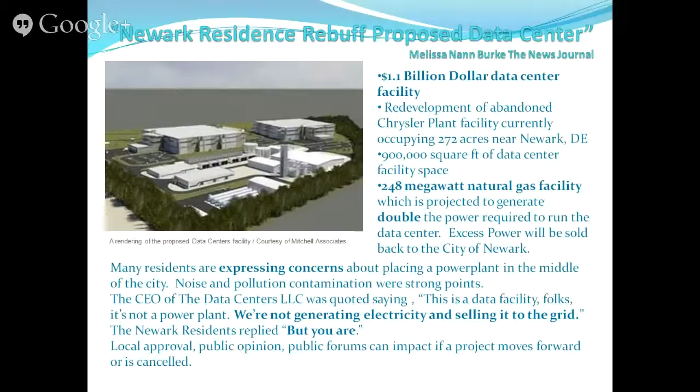This next one is OSHA proposes tougher limits for silica dust exposure. There's been a decade of studies that show that silica dust is not good. The proposal is to reduce the limit from 250 micrograms to 50. The feel in the industry is that exposure to silica is going to become what asbestos was during the 70s, and all the mesothelioma and similar symptoms are going to come about due to these silica studies. So they just want to pull it down a little bit and make sure that everybody's using the correct face protection.

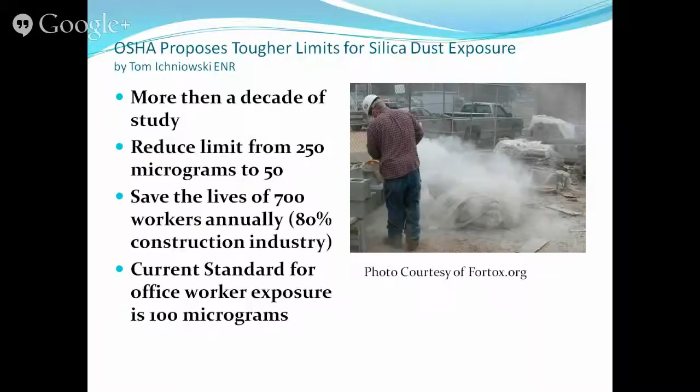Now, this is the Leo Frigo Memorial Bridge on Interstate 43 in Green Bay, Wisconsin. The bridge is having an uneven settlement issue. They're not really sure what the cause is, but there's 22 inches of settlement on one side for the single pier, and 27 on the other side, just across it, which is causing a lot of problems.

They attached sensors to see if it's moving anymore, and it hasn't. They tried to figure out what was wrong, if it was poor soils. There is a nearby landfill, and when they were renovating the bridge, they may have vibrated and compacted some of the soil, not on purpose, but at the time of the article, they weren't sure what had caused it.

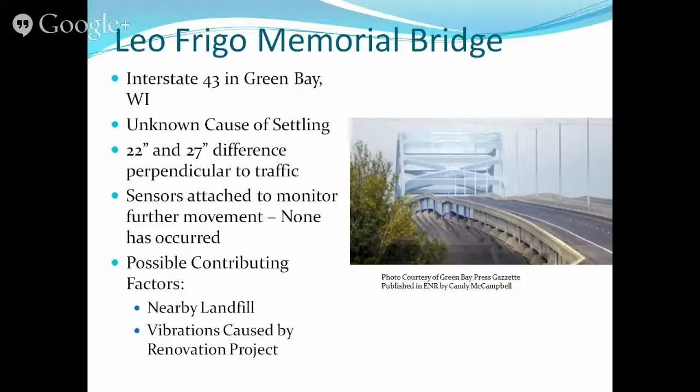This is the Southern Delivery System in Southern Colorado. It's a water management system. It's a $1 billion project. It's going to go on for the next 10 years. It's got two phases. The first phase is already underway, but the end result is that they get 50 million gallons of water out to the public. There's a bunch of pipe stations.

What's interesting is that this type of project is going to be huge if the EPA's estimate is correct, where they're saying that we need $384 billion in upgrades on our water infrastructure in the United States by the year 2030. So that's going to be a big market moving forward.

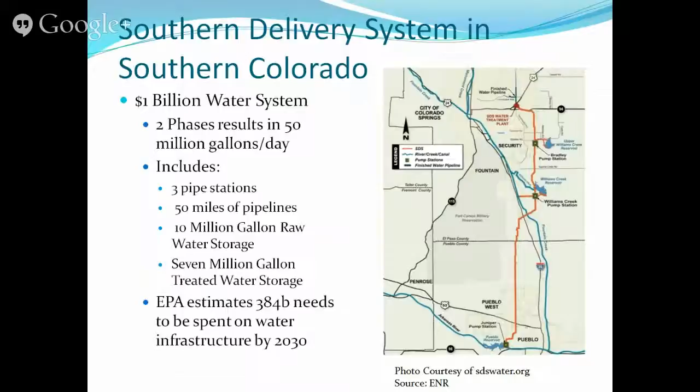They're building a pontoon bridge in Seattle. There was a problem with one of the pontoons. It actually cracked, so they had to replace it. It's a $4.65 billion rework of Route 520. So they build these concrete pontoons and then go out and float them in the river, and the bridge actually floats on them.

So when they post-tensioned the concrete in here, it caused the concrete to crack, and there are 3 other pontoons going that use the same design, that they made some modifications to, to help try and reduce the amount of cracking.

Another interesting thing on this project is they had a safety incident where alcohol was being consumed on the job site, and there's been a lot of controversy going around on this project and the way it's been managed. It's just interesting that something like that will get remembered, even though the crack is completely separate from the safety incident. Every newspaper article almost always references the safety incident as something that was going on earlier in the project. So the cost of the rework of this single pontoon is $71.2 million, and they just got it resolved here in October from the middle of the summer.

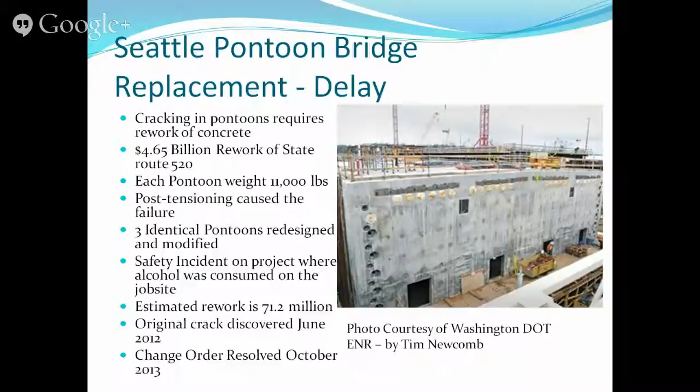This is in San Francisco. There was an existing structure that they were going to remodel. And in order to bring it up to seismic code, they were going to have to do extensive seismic installation on the inside. So instead of performing standard modifications, they looked at a Japanese pagoda, which has a single tree trunk in the middle that supports and stabilizes the core.

So they do the same thing here, where they take the core with the elevators and they put it on a bearing on an individual mat. So this entire core can pivot and shake and move separate from the outside walls. So it's an 8 million pound core that sits on this bearing. And the idea is that it'll limit the inter-story drift during an earthquake event.

By doing this, they save $4 million in retrofit costs and 10 weeks off the construction schedule. So it kind of shows the importance of modern technology or new designs on schedule and cost.

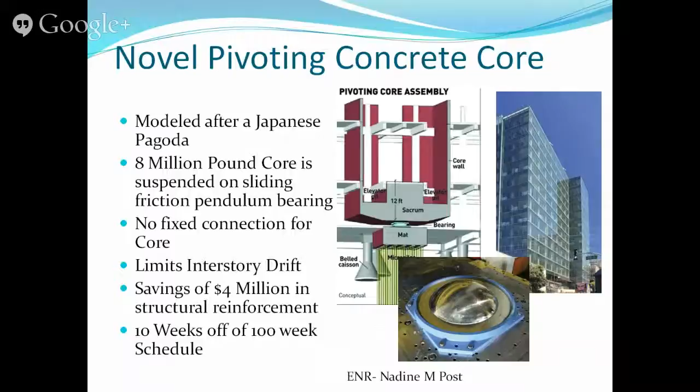This is the Atlantic Yards project in Brooklyn, where New York City is currently being sued over this project. This project uses a modular construction method where the apartments are built in a factory and shipped to the job site. The units are then assembled on the site, and their final mechanical and plumbing connections are made.

The lawsuit stems from claims that the apartment units don't have licensed professionals installing the plumbing equipment to certify it. The people being sued have responded that they do hire licensed plumbers, so it's going to come down to a jurisdictional thing, whether the plumbers need to be New York local union contractors versus where the units are fabricated. So they're set for opening oral arguments in November.

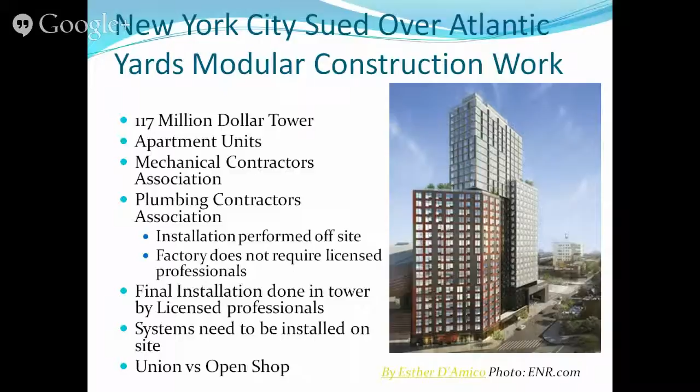This was a study performed in California on the new hybrid system. There was a big incentive put out by the government for hybrid construction equipment, and a lot of vouchers were distributed in California. California already did 1 million out there. And so this study kind of came along behind it. It was a 2-year study.

They spent $2 million studying the emissions from these hybrid machines, and they found that the smog-causing pollutant NOx had an increase between 1 and 13%, depending on the piece of equipment and the activity. However, the equipment was providing a fuel savings of 14 to 16%. These machines don't have the selective catalytic reduction systems that are required by 2014 for tractor trailers that use urea to take it to almost zero.

And since they're hybrid, they're in kind of a gray area; legislation hasn't really defined it yet. In addition, since they're a new technology, they aren't really as fine-tuned as the other products put out by these manufacturers. So there's a chance that these numbers could improve without the addition of the selective catalytic reduction systems.

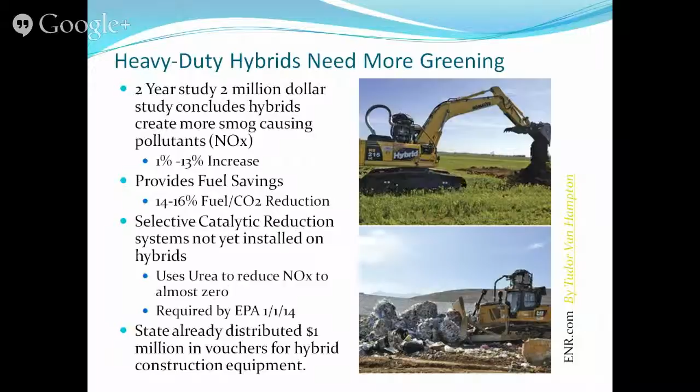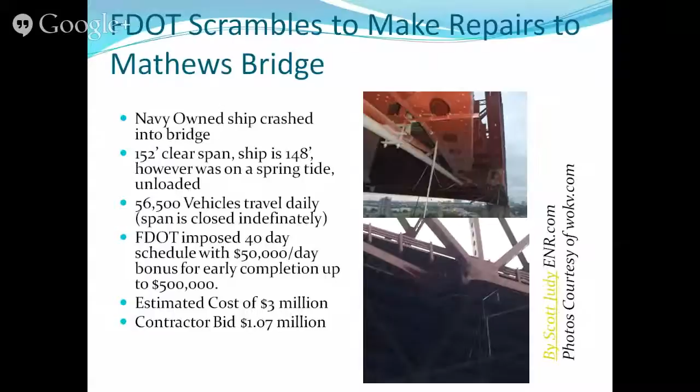There is something that's a little bit weird: the Florida Department of Transportation estimated it at $3 million, and the contractor who had the low number bid 1.07. So that's a pretty big disparity, and I believe we'll probably see another news article on this in a couple of weeks about how they either missed the deadline, or it could be a safety incident on the job, or some shortcut. So it's just an interesting no-float schedule where everything's on the critical path. So wanted to show you guys that.